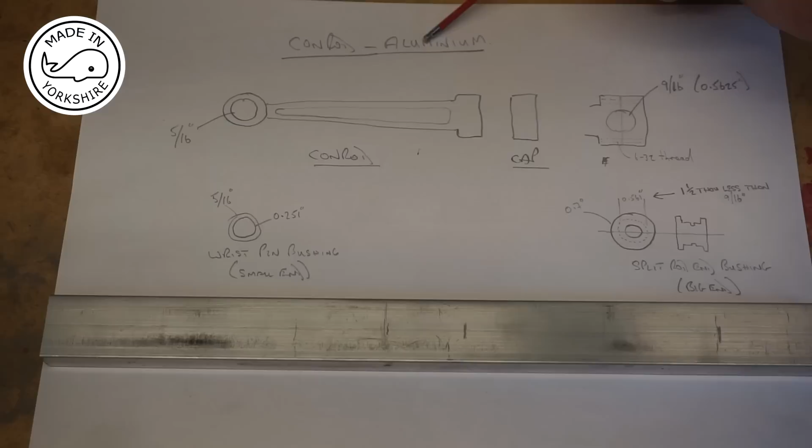Okay, so the Conrod is made out of a piece of aluminium. I'm going to be using that, and it consists of the main piece and a cap end here.

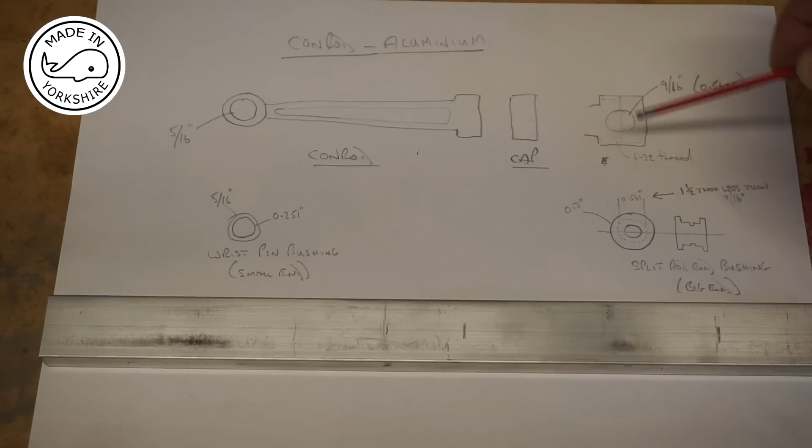So the idea will be to face these ends off and bolt them together, then drill and ream 9/16 of an inch, and that will be taking a split rod end bushing made out of a piece of phosphor bronze, and on the other end there'll be another bushing for the small end, again made out of a piece of phosphor bronze.

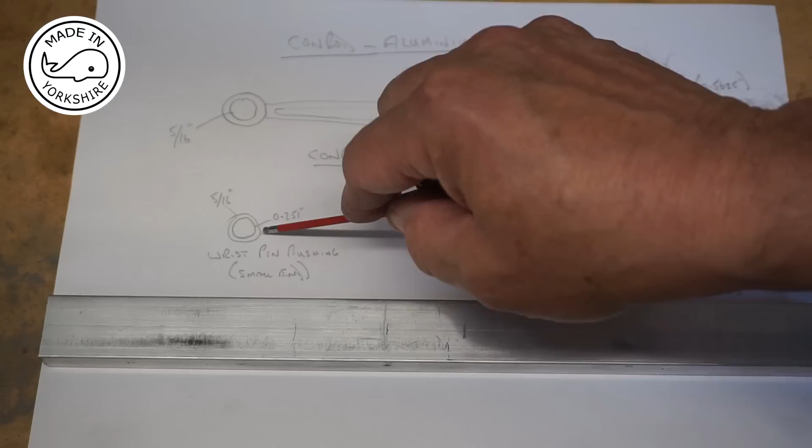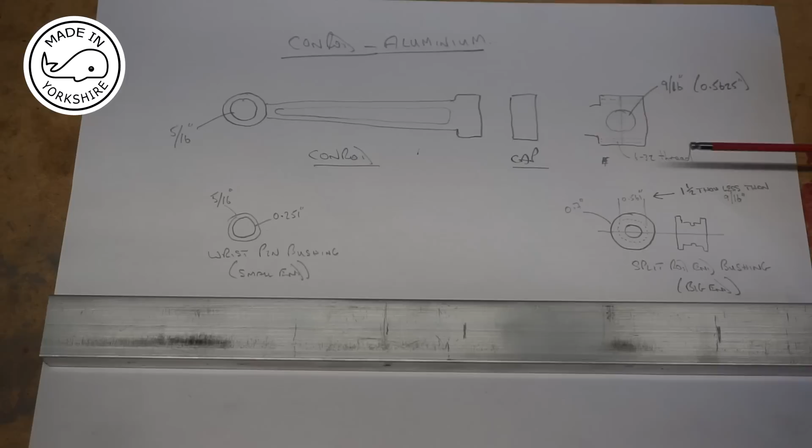Now I think the majority of my machining for the Conrod is going to be on the milling machine. But first of all, I think I need to do a little bit of work on the milling machine, just preparing this piece of phosphor bronze, because the piece I've got will actually need to be split.

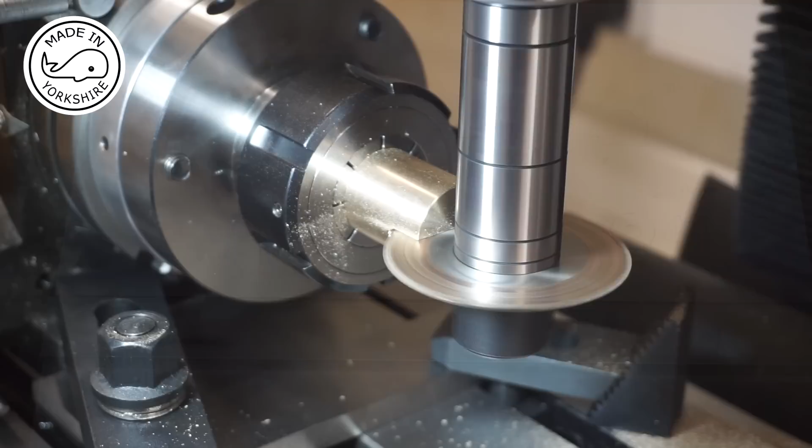So I'm just cutting this piece of phosphor bronze in half. This is for the split rod end bushing.

Well, that certainly took a while, and I had to use a hacksaw to finish the middle bit off. So what I need to do now is to clean up the faces so I can then join them together.

With some super glue. And what I've done is I've put this one in a V-block and put this square on just to make sure that this is parallel, and it is. And we'll give it a go.

Okay, so that's the two halves, and I've used a bit of emery paper just to clean the faces up. And later on what I'll be doing is I'll be joining those with probably super glue, and I'll be doing some more work on the lathe to create this split con rod bushing, aka the big end bushing.

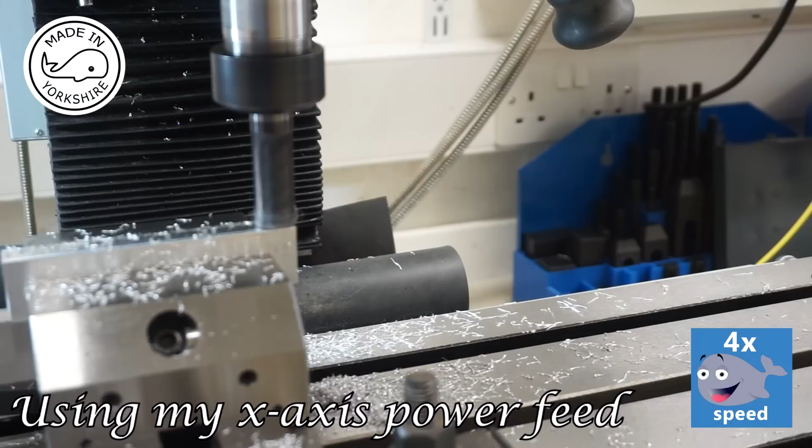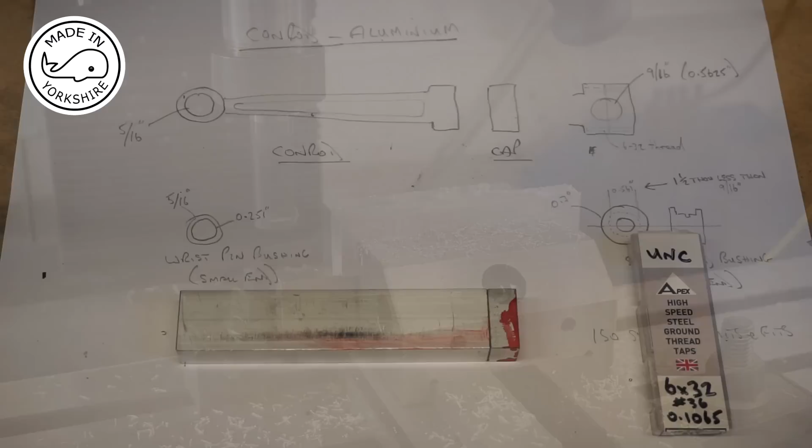So I'm just machining the main piece down to size. Okay, so I've machined the main piece and the cap to the largest dimension, and I've used some superglue to stick both pieces together.

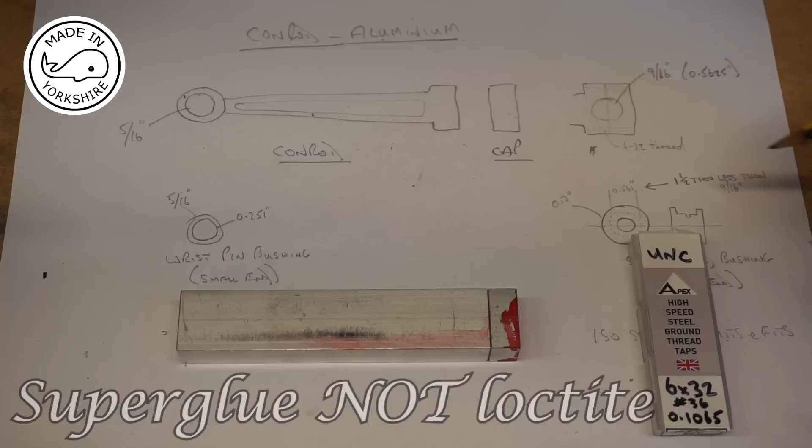So what I need to do now is to drill and tap 6x32 UNC.

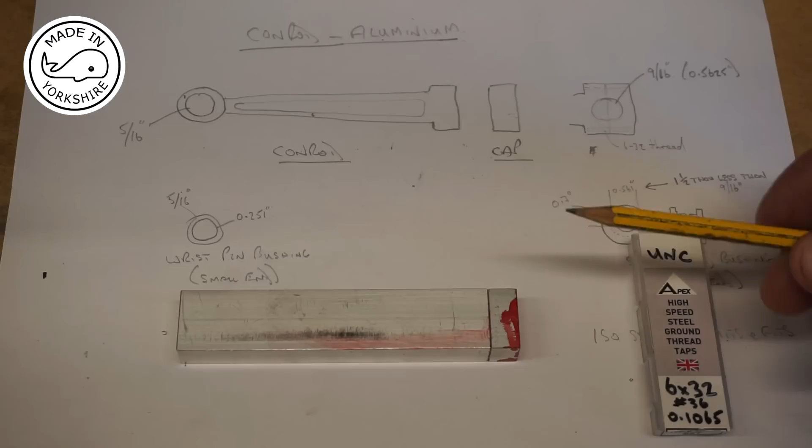So first of all I need to use a number 36 drill to drill through 0.8 of an inch in two places, as I marked up.

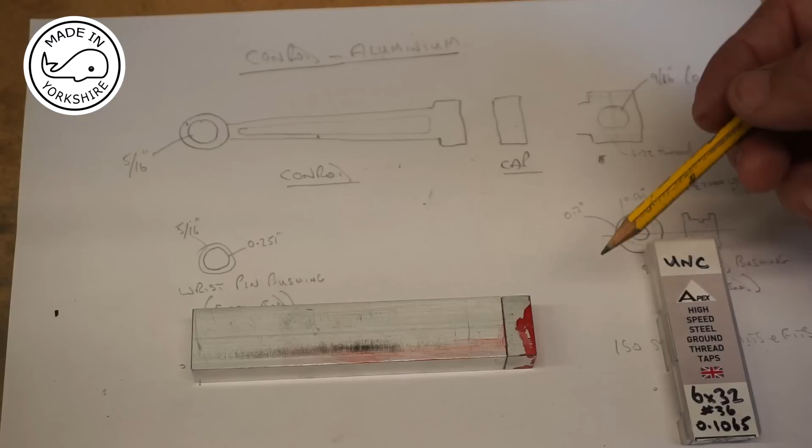Once I've done that, I then need to open up this top bit out to be 6x32 clear, and I think probably a 3.5mm drill bit should do that, so I'll just drill that to a depth of 0.4 of an inch. Once I've done that, I can then tap the lower bit, 6x32.

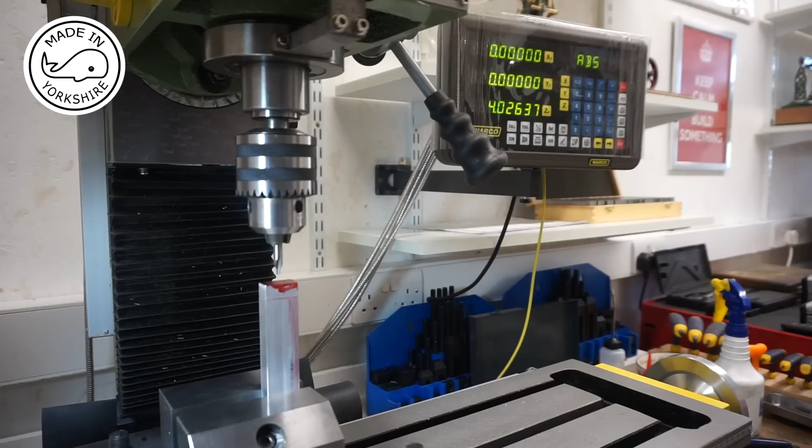Okay, so what I need to do now is move the x-axis 0.3125 to the right, then drill and tap. And then once I've done that, I want to move it to the centre again, and then move it 0.3125 to the left, and then drill and tap again.

And let's hope that the super glue sticks.

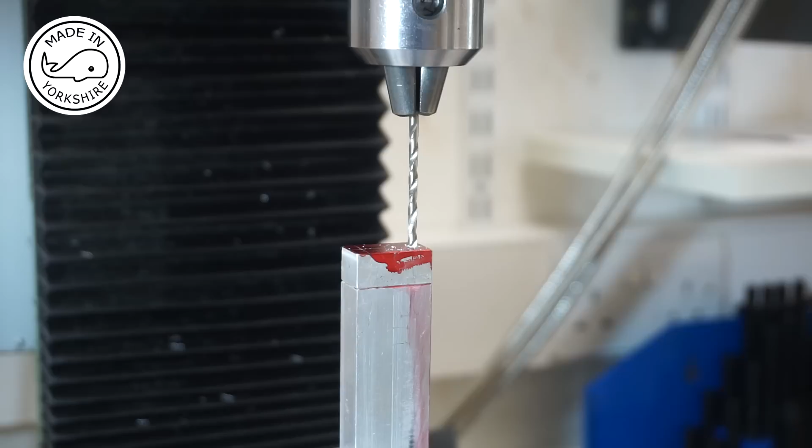So I need to drill to 0.8 of an inch with this tapping drill. It's a number 36. Now the 3.5mm drill bit for 0.4 of an inch.

Well, that seems to have worked out okay. Now if I had a bolt, I'd put that in for extra security before drilling and tapping the other hole. But I've not got one, so I'll just follow exactly the same procedure as I did before, but I'll do it all off camera.

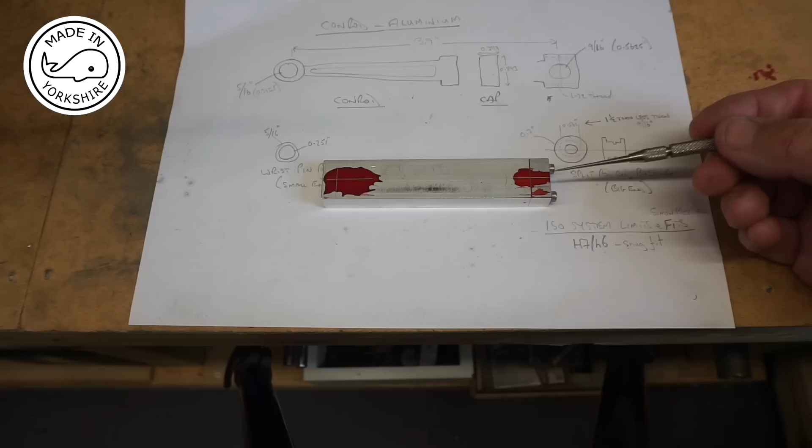Okay, so the bolts have arrived. So what I did was I broke the glue joint, cleaned up the faces, and then I've bolted it back together. And now I've marked up where I need to drill the two holes, one for the big end and one for the small end.

And obviously the big end needs to be centred on the join and in the middle of the width, and the little end needs to be 3.9 inches from that point up to there where I've marked.

So this process needs to be done sort of as one process really, and I'll put it in the milling vise and I'll drill and ream this hole to be 9/16 of an inch, and once I've done that I'll leave it all set up in the vise to make sure that when I drill this hole and ream it to 5/16 it's going to be spot on, sort of parallel with this hole.

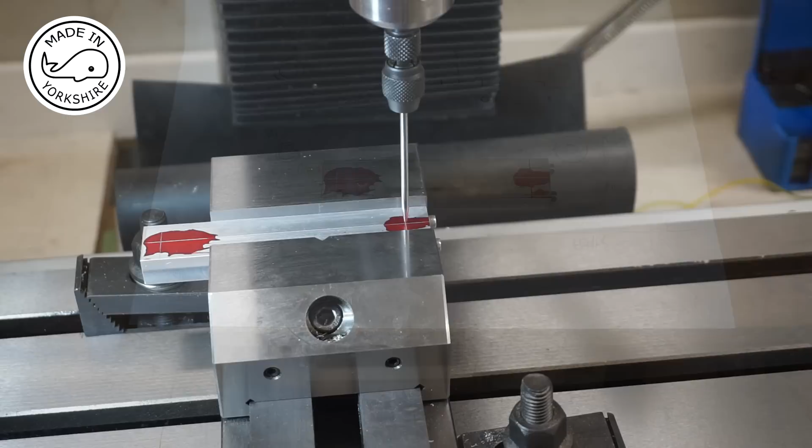Okay, so I use an edge finder to find the position, and I've then put this wiggler on just to double check, and everything looks spot on.

But I've just realised that I've not got a 9/16 reamer, and I've also realised I've not got a 35/64 drill bit, which is what it needs to be drilled up to prior to reaming. So I've ordered those two things, and I'll obviously have to wait for those to arrive.

But in the meantime, what I'll do is I'll centre drill and drill up to 1/2 inch in diameter, and then once I've done that I'll just leave the mill as it is and wait for those other bits and bobs to come through the post.

So I've moved the x-axis along to the right by 3.9 inches, and now it's just a matter of centre drilling here and then drilling and reaming to 5/16 of an inch.

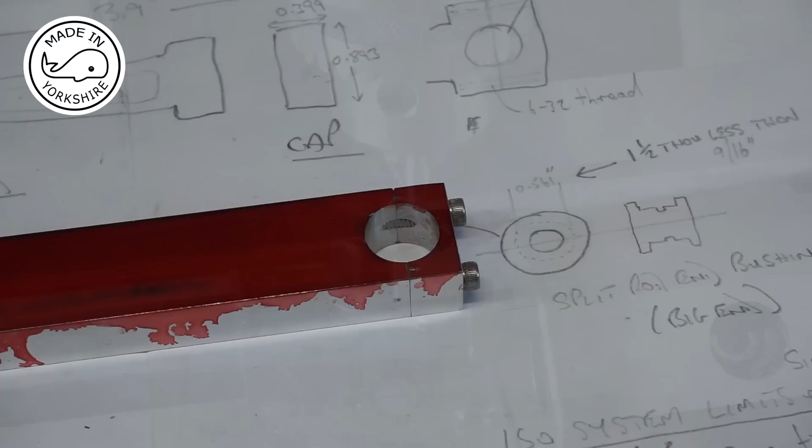I'll do the rest off camera. Well, these bolts have ended up being sacrificial bolts because the reaming has taken some of the thread off, and that explains why the split rod end bushing has got a little groove there. That's so that the bolt can actually pass by the bushing once it's assembled.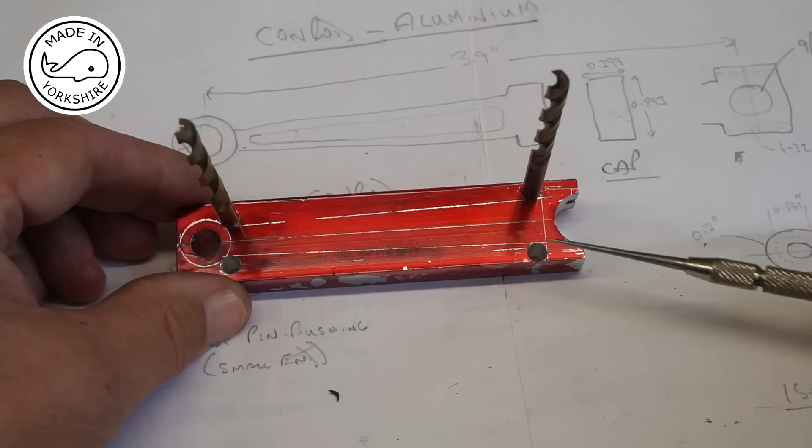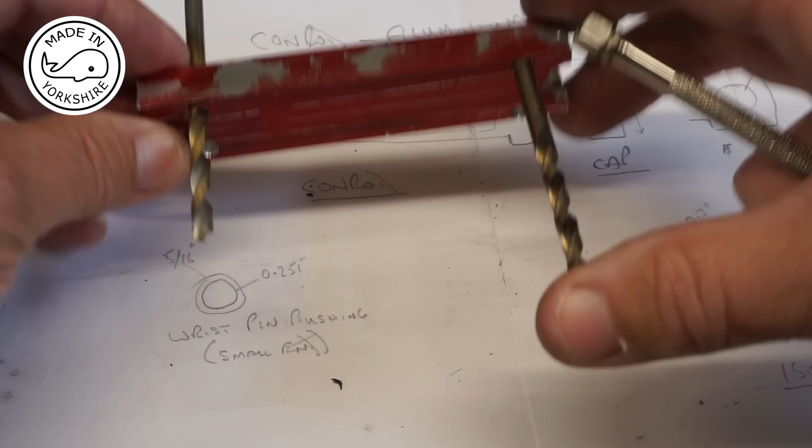Okay, so I've marked up the outside edge, and I've used a 5/16 drill bit to drill through here for these corners to put a little radius on. What I'm going to do now is leave these drill bits in here, and go to the milling vise and slot it on the milling vise with a parallel under the front and under the back, and that will mean that edge here will be exactly parallel with the top of the vise, and I can mill it down to that level.

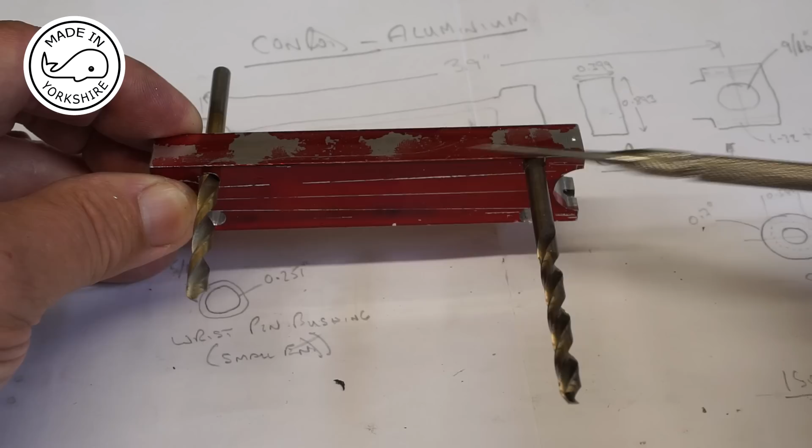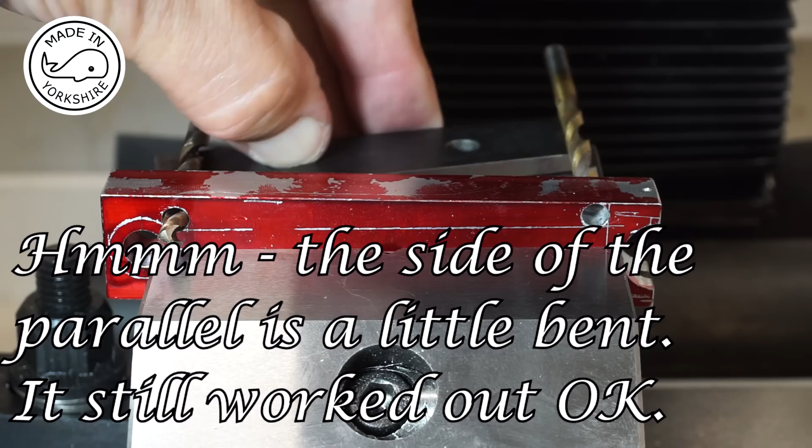Well, this approach seems to work okay, so all I need to do here is remove the parallels, remove the drill bits, and now I can just mill down to that point, that scribe line.

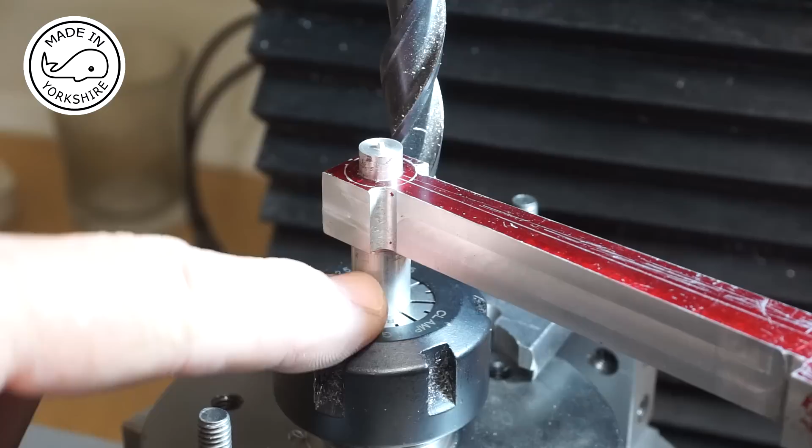Well, it's starting to take shape, so I've superglued the little end onto this mandrel and just put it on the rotary table on the mini mill. So I just need to turn this end here.

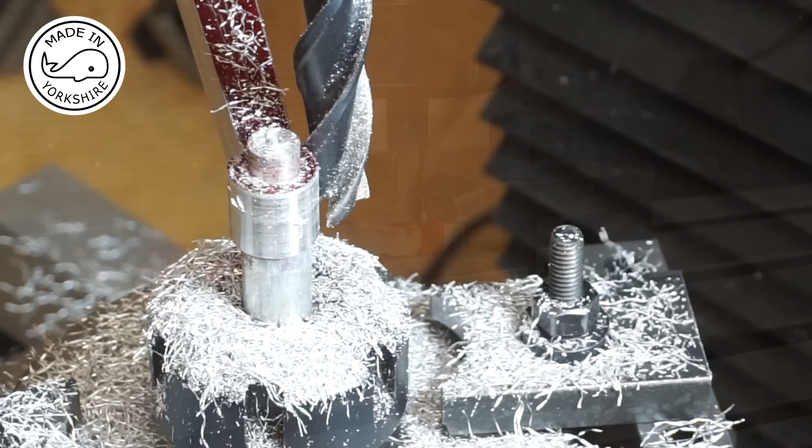So now I need to take off 64 thou on each side, and this is between the big end and the small end. Now it's a shame I didn't realise this when I was turning the small end, because I could have put the radius on that bit there, but I'll probably finish that with a hand file. We'll just have to see how we get on.

So I've just done it this way because I didn't want to be having to be very, very careful getting up to this end here. So I've got that down to the right depth. I'll repeat the same process on the other side and then clean up all the middle out. But I'll do all that off camera.

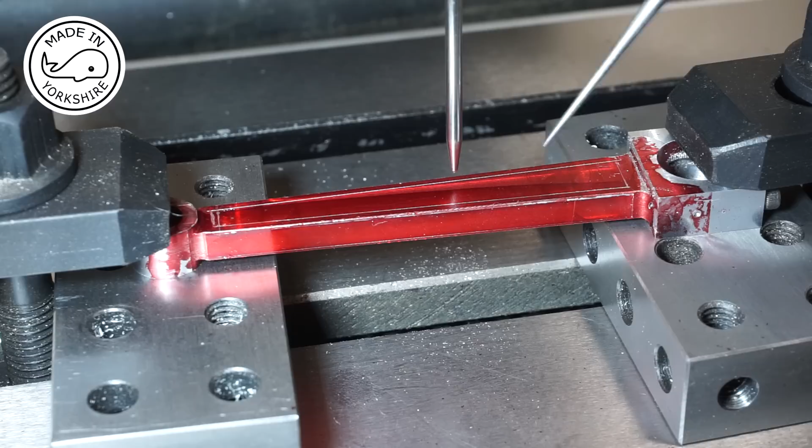Okay, so the drawing shows a requirement to mill this centrepiece out to a depth of around about 60 thou, and I think it's just to make it look pretty. But anyway, I've used this scribe to draw the outline, and I've put this wiggler on to make sure that this top line here is parallel with the bed, and it is. So what I'm going to do now is move the y-axis that way.

About 2.5 millimeters, and I'm going to use a 5mm slot drill, and move the x-axis this way, and drill there to a depth of 60 thou. Then I'll move the x-axis the other way and drill there to a depth of 60 thou, and then mill it out in between those two recesses. Once I've done that, I'll repeat on this side here.

Obviously I'll have to put a wiggler on to make that parallel, and gradually over time the idea will be that I've got all this centrepiece milled out to a depth of 60 thou. Once I've done that, I'll switch it over and repeat the same process on the other side.

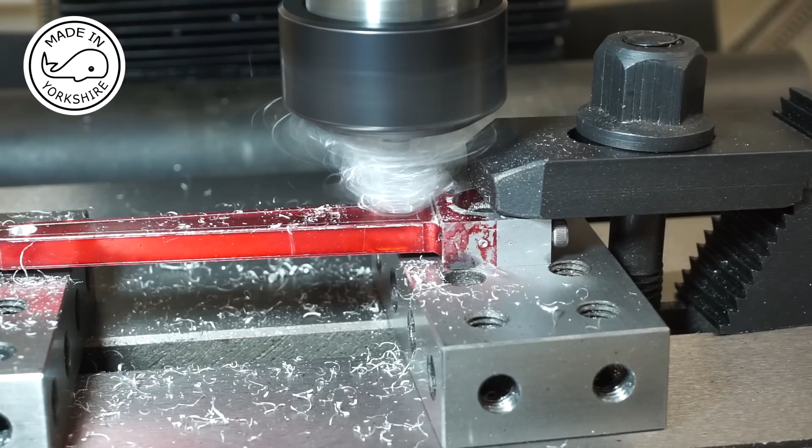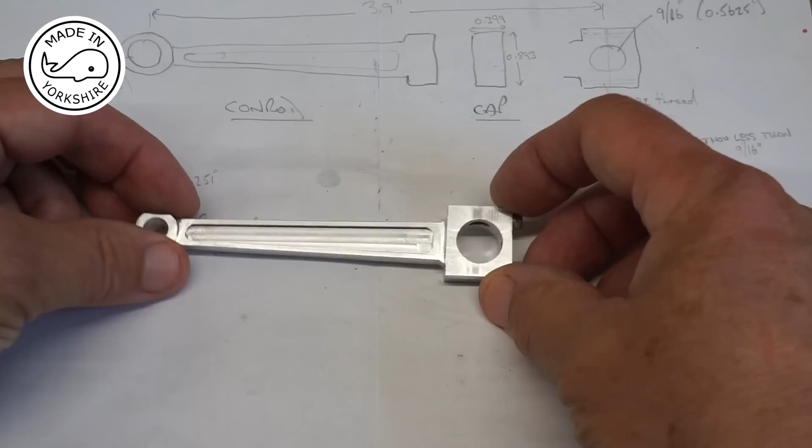Well, that seemed to have turned out well. And what I did off camera was I drilled a little oil hole in there, and it comes out in the centre there.

So all I need to do now is to round these edges off, and the way I'll do that is I'll put it in the 4-jaw chuck in the lathe. I'd already centred on the end here, so I can put a live centre on and put that end in a 4-jaw chuck, and then it's finished.

Well, I don't know. It took me about 4 or 5 weeks to complete that from start to finish. First of all, I had problems with the big end because I didn't have a drill bit and a reamer big enough. Then we had a couple of days away on the south coast, had a bit of a break. Then my PC started playing up with the graphics card, so it's running like a 3-legged dog at the moment.